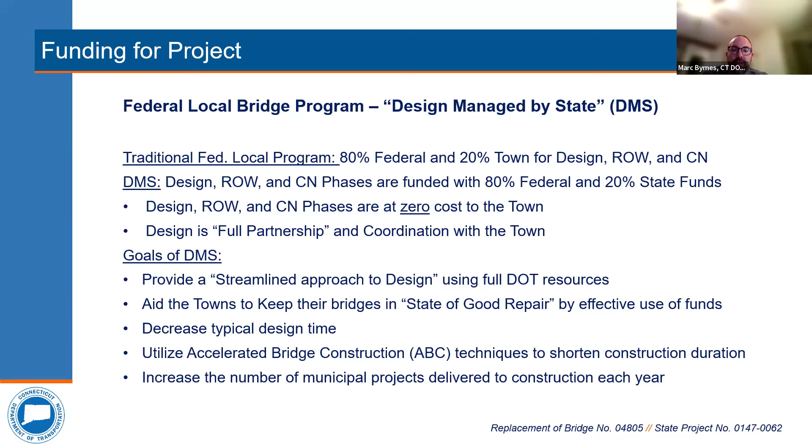While we are taking the lead on the design and the costs, it is still a full partnership and coordination with the town. The goals of the DMS program were to provide a streamlined approach to design using DOT resources, to aid towns in keeping their bridges in a state of good repair, to decrease typical design time, and to utilize accelerated bridge construction, or ABC techniques, to shorten construction duration and to increase the number of municipal projects delivered to construction each year.

I'll now turn it over to Tracy Hansen, Selectwoman for the town of Voluntown. Tracy?

Hi, good evening, everyone. Thank you for joining us tonight and welcome. I'm glad to see so many people here, and I encourage everyone to use the chat box to ask questions. Thank you, Tracy.

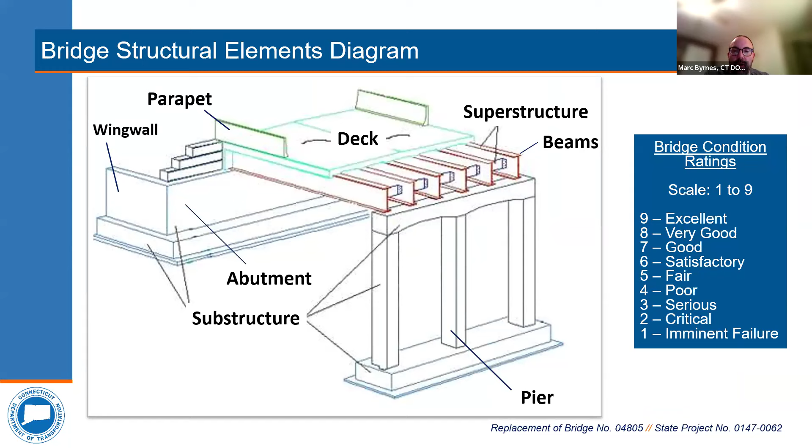The bridges are rated on a condition scale of 1 to 9, with 9 being excellent and 1 being an imminent failure. But please don't let that concern you, because if there were any issues, the bridges are monitored by the department and we would inform the town if there was a pending hazard.

As concrete cracking gets more severe, more concrete will pop off, exposing the reinforcing steel underneath. There are also other types of cracking that happen from settlement and different weight loads on the concrete.

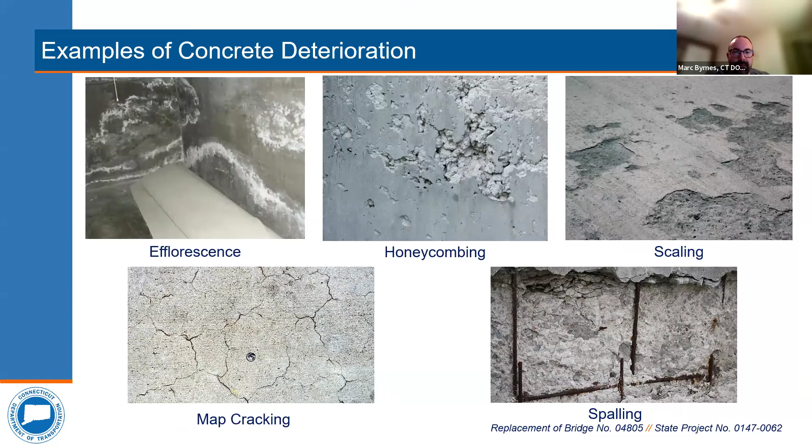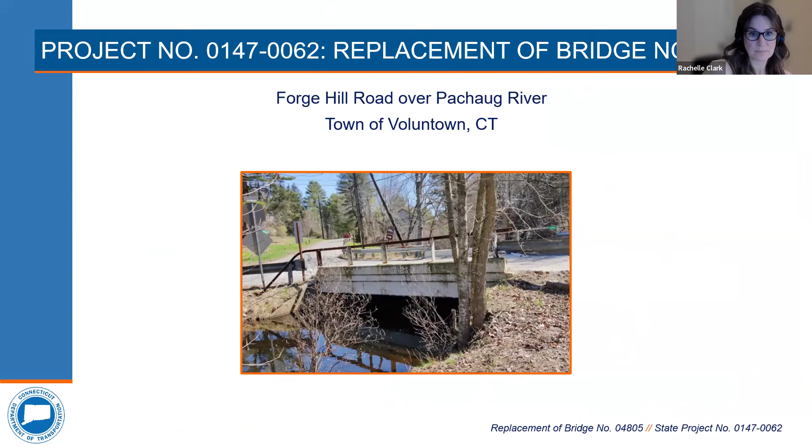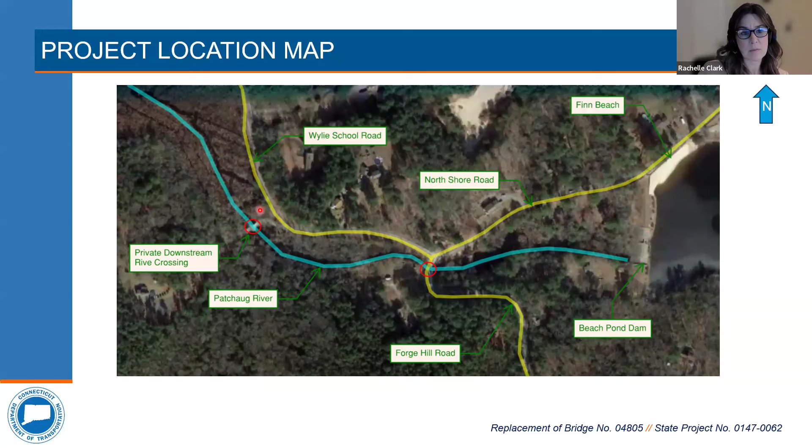The width of the bridge, from curb to curb, is 20 feet wide. This is substandard - federal standards are 22 feet and state standards are 22 feet as well. The ADT, average daily traffic, the number of vehicles that cross the bridge, is approximately 651 vehicles. Those traffic counts were taken in November of 2022.

The speed limit in the area is 25 miles per hour. Forge Hill Road is 25 miles per hour, and that is our design speed. When the traffic counts were done, the speeds were also taken. It was determined that the 85th percentile speed is 19 miles per hour, meaning 85% of cars are going 19 miles per hour or slower.

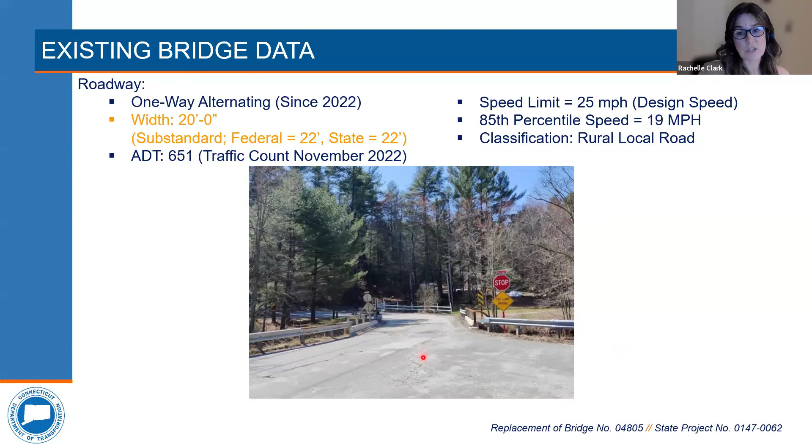This bridge is classified as a rural local road. In terms of our existing bridge, it was constructed in 1920, which makes it about 104 years old, so it's a fairly old structure. It was repaired in 2022 - there was an accident that damaged the north bridge rail.

That concrete slab is supported on abutments, and those abutments are supported on spread footings that are assumed to be supported by soil. Obviously these footings are below water and can't be seen. In terms of load restrictions, there are no load restrictions on this bridge currently.

In terms of hydraulics, the bridge is inadequate for a 100-year storm. Currently we have a 19.7 foot clear span, measured from the face of one abutment to the face of the other abutment. This is less than 30 feet, which is what would be required to meet standards.

That standard is 1.2 times bank full width. Bank full width is a way of talking about the river when it is running in an ordinary state - how high and how wide those banks are with ordinary water flowing through them.

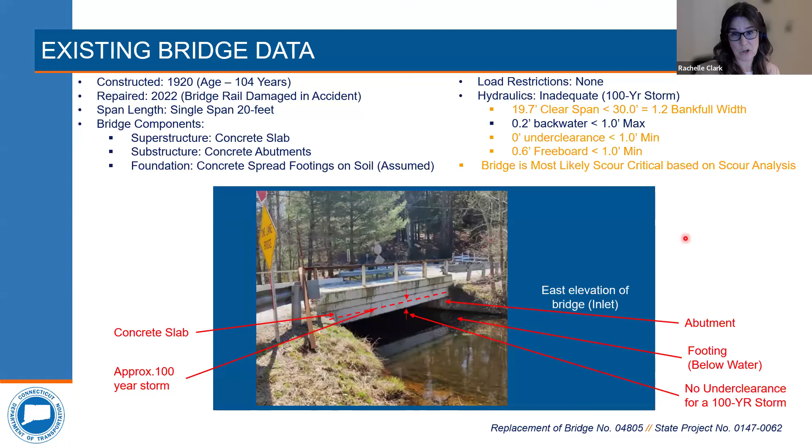Looking at our bridge, our deck, because it's covered with a bituminous or asphalt overlay, is really kind of the condition of that overlay. That's currently rated to be fair and was given a rating of 5.

Looking at our superstructure, this is where we begin to see problems. This is in poor condition and has been given a rating of 4. Our substructure is in fair condition, rated at a 5. Our approaches are also in fair condition, rated at a 5, and the channel and channel protection are satisfactory, rated as a 6. Currently, the bridge railing is rated a 7.

That rating is related to the condition of the railing. Our bridge railing currently does not meet the current safety standards. So if this bridge were to be built today, the railing would look quite a bit different.

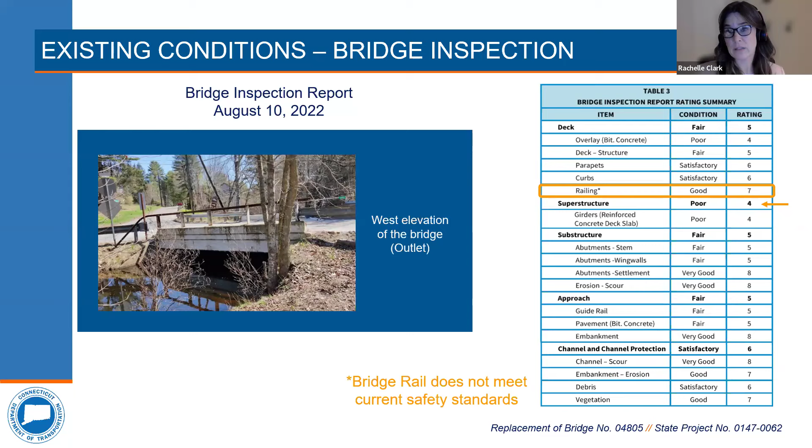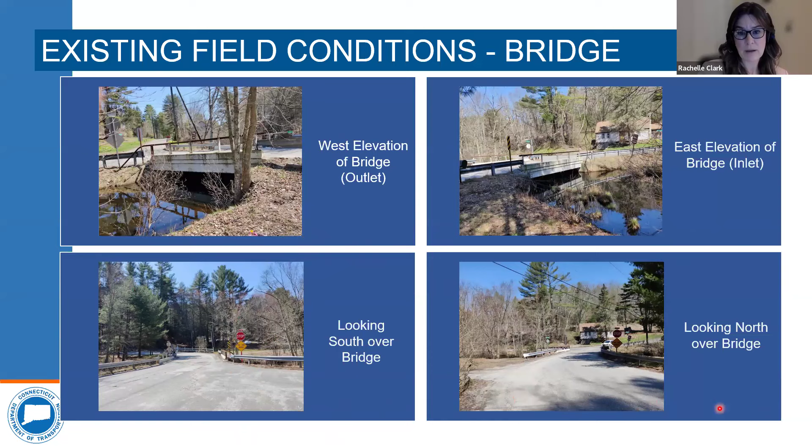Looking south over the bridge, you can see again that stop sign that I pointed out before. From the other direction, the photo in the bottom right is looking north over the bridge.

The top left photo is Forge Hill Road, in an area where we're trying to demonstrate that this has a fairly sharp curve as you come down Forge Hill Road. This is a tight radius as you approach the bridge and cross over. A couple other things to know: there are 2 driveways immediately adjacent to the bridge.

In the top right photo, we have a view of a skewed T intersection and poor condition of the overlay. You can see that the asphalt has broken up a little bit here. Again, this is an intersection where people come down and swing around to the right, making a hairpin turn. It's a skewed intersection as opposed to a true T intersection where you've got that 90 degrees.

The bottom left photo is the Western Bridge Rail. Where the arrow is pointing is where the curb was damaged in the accident, and this was the portion that was repaired. The bottom right photo is the Eastern Bridge Rail. No damage to that one, but again, this is a substandard bridge rail.

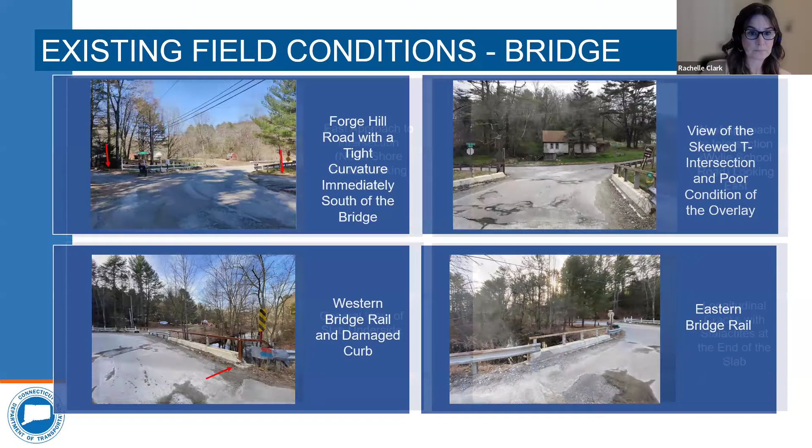The top left photo is the eastern approach to the intersection. As you're traveling down North Shore Road toward the bridge, this is what you would see. The west approach is in the top right photo. This is what you would see if you were traveling on Wylie School Road and approaching the bridge.

The next 2 photos have more to do with the condition of the bridge. The bottom left photo is the general view of the slab underside. This gives you an idea of what the bridge would look like if you were able to get under and look up toward the underside of the superstructure.

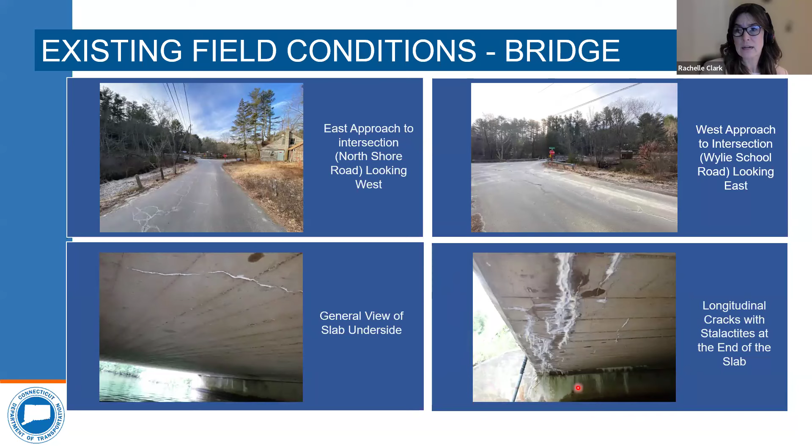The next photo is taken closer to the edge. What you see here is stalactites that have formed as water has dripped through the cracks in the concrete. It's brought minerals with it and formed those stalactites. So these are the kinds of things we see that indicate the superstructure is in poor condition and showing its age.

The southeast wing wall is shown in the top left photo. You can see a large amount of efflorescence, which occurs in areas where the concrete has cracked and water has flowed through it, taking dissolved minerals with it and then depositing them on the surface of the wing wall. All 4 wing walls look pretty similar to this photo.

The top right photo shows the north abutment. Again, you can see those stalactites from the cracks, but this photo was really meant to show you the condition of the abutments, and those abutments are in fair condition.

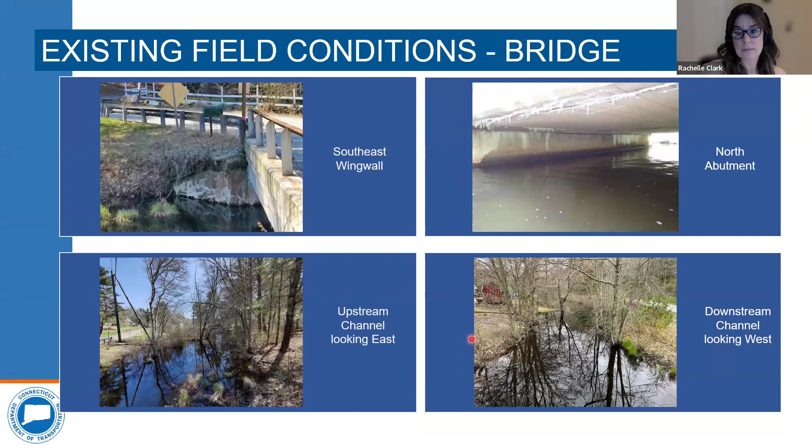The photo in the bottom left shows what you'd see if standing on the bridge looking upstream, so looking east, this is what the river looks like. In the bottom right-hand photo, we have a view of the downstream channel, looking toward the west.

In terms of the project and why it was initiated, there are several needs for this particular project. One is to restore two-way traffic. Another is to address the poor condition of the superstructure. Also to address scour and make sure we're not concerned about material washing away during a large storm in the riverbed.

We also need to determine the load rating capacity to confirm adequacy to carry legal loads and emergency vehicles, replace the substandard bridge rail that was damaged in the accident in 2022, and provide a 22-foot wide roadway that meets current standards.

We were also asked by the town to provide a 5-foot 6-inch sidewalk on the east side of the bridge. And we're also looking to improve that intersection, that skewed T intersection, and make it a better configuration.

So in terms of being able to address all of these things, our proposed rehabilitation is to fully replace the bridge. Despite the deficiencies, the bridge is safe for traveling public, and is inspected by Connecticut DOT on a regular basis.

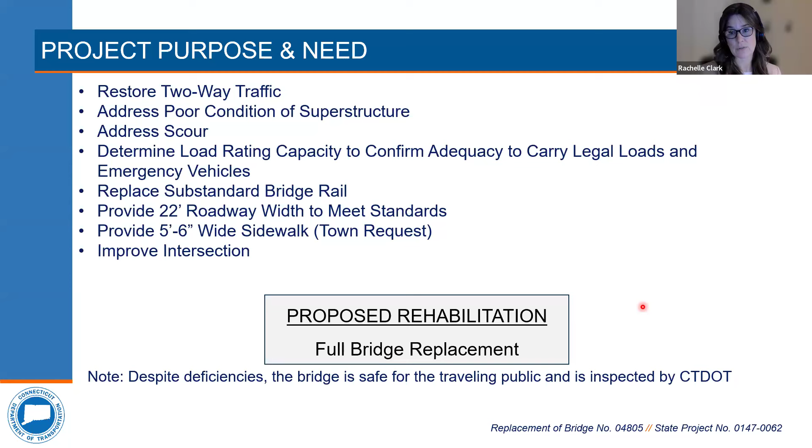For our proposed improvements, we are proposing a pre-stressed concrete solid deck beam bridge. This will provide two-way traffic with a 22-foot wide roadway. This bridge is anticipated to have a 75-year service life with minimal maintenance. It will carry AASHTO design, legal, and permit vehicles, as well as emergency vehicles.

The pile foundations proposed for the project will be designed for scour. It will have an open bridge rail and an approach rail system meeting current standards.

If you see the bottom photo on the right, this is a concrete bridge. You can see this portion right here, this is what a concrete beam looks like from the side. This black rail is an open bridge rail, and in the top right you can see another photo showing that open bridge rail.

In terms of the bridge functionality, we are proposing that 5-foot 6-inch sidewalk that the town requested. We're intending to take that skewed T intersection and square it up to improve that intersection and also improve roadway drainage. We're looking also to improve the hydraulic performance by widening the structure.

It'll have a 34-foot span, which gives us a 30-foot 6-inch clear span, that's face of abutment to face of abutment. That will give us 1.2 times our bank full width and meet current standards.

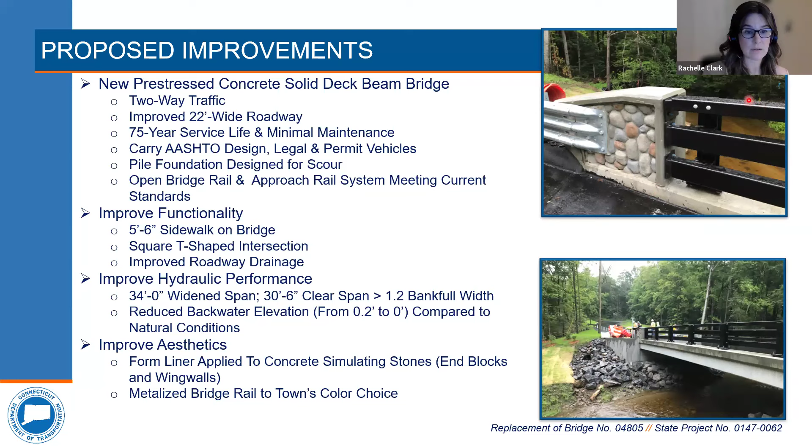Our concrete solid deck beam bridge is comprised of 6 concrete deck beams. Looking at this cross section of the bridge, you'll see that it is 31 feet out to out, comprised of 2 11-foot lanes, our 5-foot 6-inch sidewalk, and 2 1-foot 9-inch bridge rails. That's supported by our 6 solid concrete deck beams, which are joined by closure pours.

The bridge is protected with a spray applied waterproofing membrane that is then topped with an asphaltic topping layer.

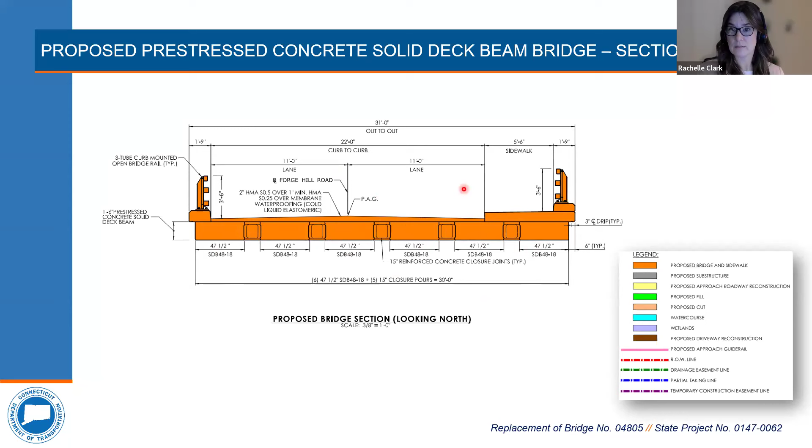This is an overview of the proposed bridge layout.

Just to run through some of these colors real quick: orange is our proposed bridge and sidewalk, the gray is the proposed substructure, yellow is the proposed approach roadway and intersection, the green areas are proposed fill, and the tan color indicates areas of proposed cut where material would be removed.

The blue is the water course. Purple is wetlands, so that's what's shown in these areas of purple. And then the darker brown are the driveways that are adjacent to the project.

The pink line shows where there will be metal beam rail. The red lines are rights-of-way lines, so these are property lines. The green lines indicate areas of drainage easements. Blue lines indicate areas of partial takes, and purple indicates areas of temporary construction easements.

So looking at this plan of the bridge, you can see that we have a 34-foot span. The bridge is slightly set on a skew, so when we actually look at the clear span, face of abutment perpendicular to face of abutment, that distance is 30 feet 6 inches.

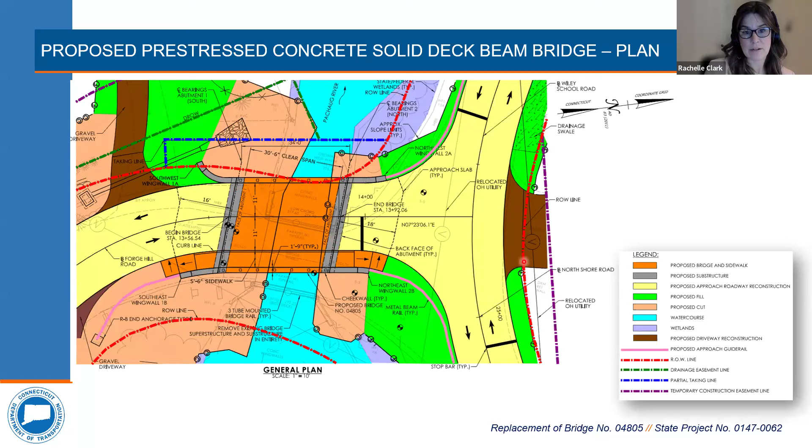The orange, again, is our superstructure. The gray is our substructure, and this has U-shaped wing walls. And the yellow is our roadway.

This is a picture of the bridge taken from an elevation view. Again, you can see that we have our 30-foot span. We have our superstructure with our 3-tube open bridge rail. We have wing walls on both sides, and we've indicated our form liners to give it that stone look.

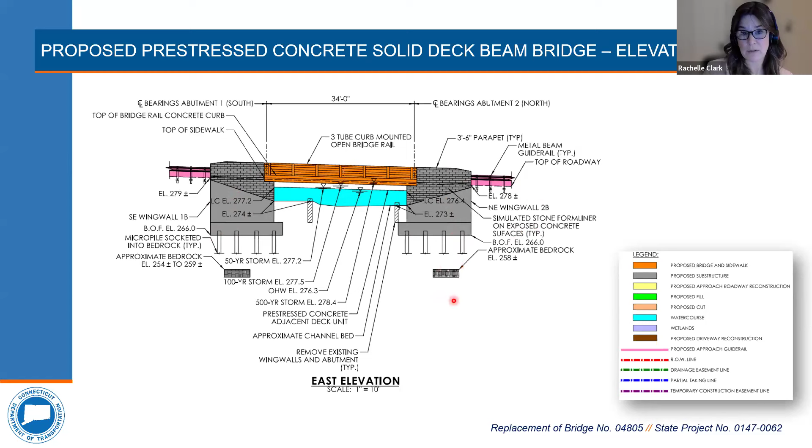We also have metal beam rail that attaches to each end of the beam of the bridge. Our wing walls and our abutments are supported on pile caps. Those pile caps in turn are supported on piles, and those piles will go down to bedrock, and all of that will be designed for scour.

We were pretty much limited to making sure that the property here could maintain their existing driveway. So that drove a lot of our preliminary design, and the roadway didn't raise or lower. We are widening the bridge, and in order to get that additional width, the bridge was expanded to the south.

I do need to step back a minute. One thing I forgot to mention is that in these plans, north is to the right, and I apologize for not explaining that earlier. It's a little confusing, but if you were to come down the roadway and cross the bridge, you would be moving from south to north. So if you are on this page and on the left-hand side, that is actually south, and over here is north. I should have explained that with the first plan of the bridge.

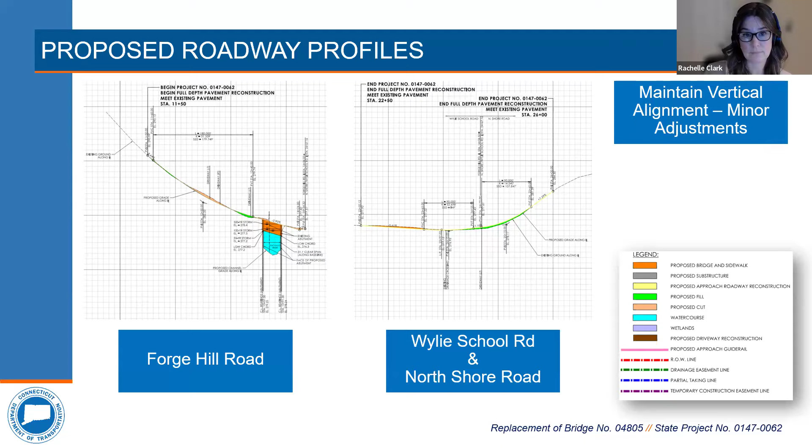So that's not wide enough for 2 lanes of traffic. It'll be alternating one-way traffic similar to what's out there now. The biggest difference is that this will be stoplight controlled as opposed to stop sign controlled. There will be detectors that detect vehicles and turn the lights from green to red as appropriate to allow traffic from the 3 different roads.

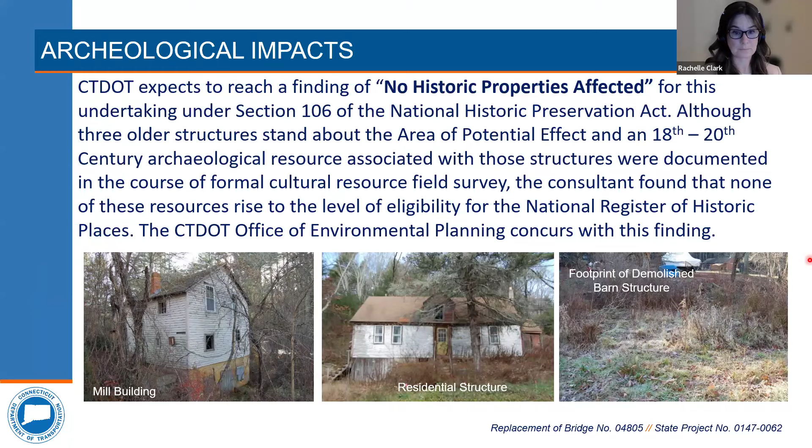In terms of rights-of-way impacts, this work is going to affect the neighboring properties. There are 3 properties: one to the north of the bridge, one to the southwest of the bridge, and another to the southeast of the bridge. Again, this plan is oriented with north to the right.

Looking at the impacts, because of the new alignment of the bridge, there will be a small portion of property that will need to be taken to accommodate both the substructure and the town's need to maintain the structure. There are 3 areas that will require drainage easements as part of the project, and 3 areas of construction easement on the properties. The largest construction easement is to the southwest of the bridge, primarily to accommodate construction of the temporary bridge.

In addition to that, there are some rights that will be required. There will be a right to grade, which makes sure the proposed grades smoothly transition to the grades on adjacent properties. There will also be the right to reconstruct driveways - there are 3 driveways in the area that will be impacted by the construction. And last will be the right to install and maintain sedimentation and erosion control fencing.

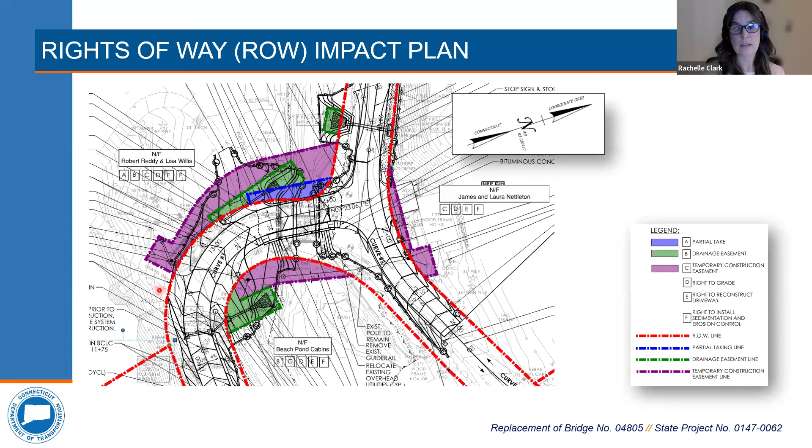Thanks, Rachelle. My name is Zachary Garino, project coordinator with the department's Division of Rights-of-Way. Our office is responsible for acquiring the property rights needed for transportation projects. This project will require acquisition of property rights, so I'd like to give a brief overview of our acquisition process.

Before I begin, the specific impacts are still being finalized and may change as the design progresses. Any required property rights will be acquired in accordance with Connecticut General Statutes sections 13A-73 and 13A-98E, as well as the Uniform Act.

The right-of-way acquisition process begins once the design has progressed to a development milestone and all impacts have been determined. At this point, each affected property owner will receive a formal letter of intent to acquire from our office, along with a property map depicting the exact property rights to be acquired.

On the screen here is an example of a property map that an owner might receive. They'll see the proposed conditions for their property and the areas associated with those improvements.

Next, our office will determine the fair market value of the property rights depicted on the map, which will be used to establish an offer of just compensation.

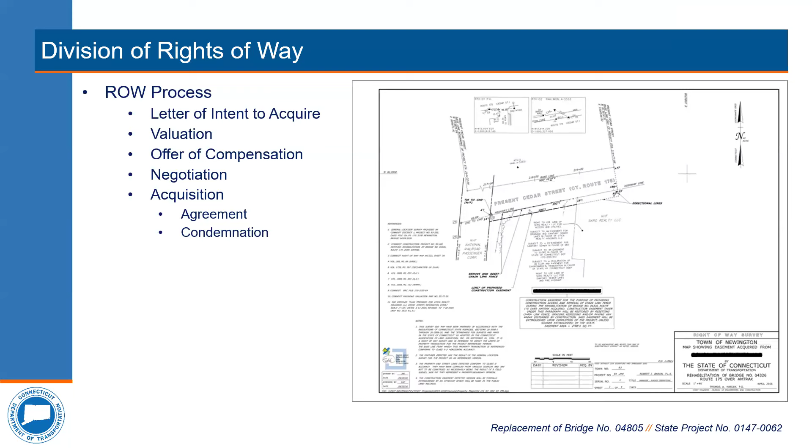Thank you, Zach. In terms of our project schedule, currently this project is slated to begin in spring of 2026. That is subject to getting all of our permits approved.

The construction duration is anticipated to be 20 months. There are a significant amount of overhead utilities that need to be relocated, which is why we anticipate a little bit longer than a 1-year duration.

Our construction cost is $4,360,000. Again, this is 80% federal funds and 20% state funds. So this project is at no cost to the town.

One thing important to note is that the cost and schedule are preliminary and subject to change. At this time, we will open up the program to a question and answer session.

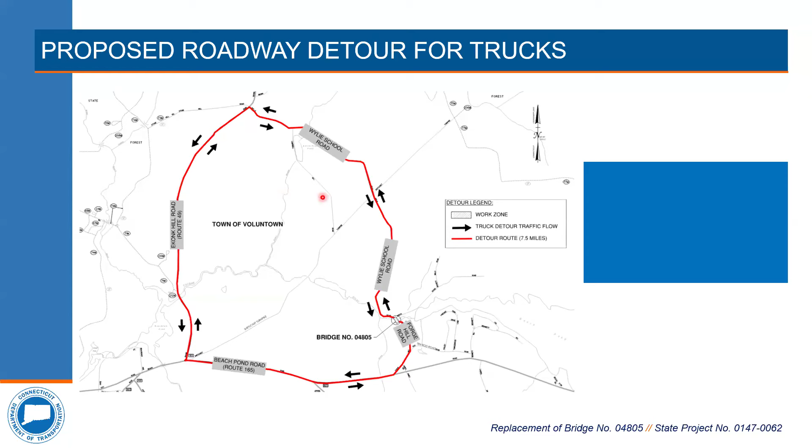I don't know, I have not gotten anything in the Q&A portion of our chat box for the presentation at this time, but I believe the sharp turn near Hardica's would be taking a left onto Shetucket, right there. But this detour goes straight. So he's probably referring to this one, just west of the tree farm.

Is that west? This area here. So that turn. Let's zoom out a little bit, Rachelle. Okay, I was going to try to see if we could take a look at it. That is the question, the turning question. Yes.

One of the things that does appear is that this is kind of... I believe this is the right spot that we're looking at. So we can definitely ask the designers to take a look at that. If it does turn out to be a problem, this is an area where we could do some additional temporary pavement to make that an easier turn.

The detours for truck traffic are previously mapped to make sure that they can accommodate the radiuses required for a typical 18-wheeler dimension.

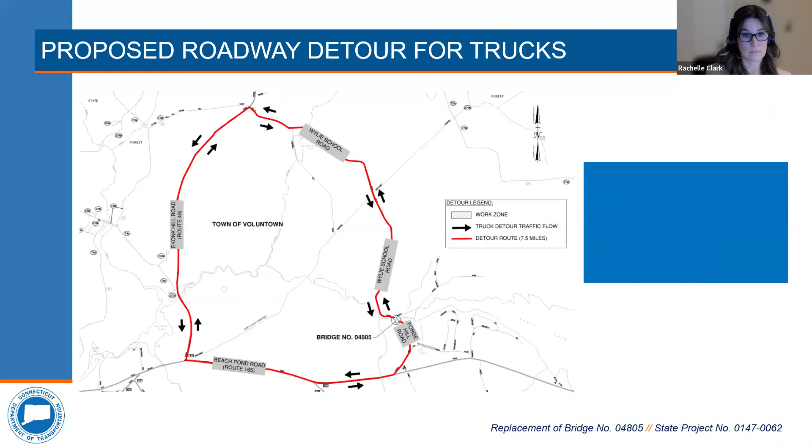Rachelle, is this project going to cost the town anything? This project is being funded with federal funds, coming from FHWA, Federal Highway Administration. That's 80% of what it costs to design and build the project. Then 20% of the money is coming from the state of Connecticut. So there is no town money being used for the design, the rights-of-way acquisition, or the construction of the project.

Great, thank you very much, Rachelle. If there are any other questions at this time, you're more than welcome to ask.

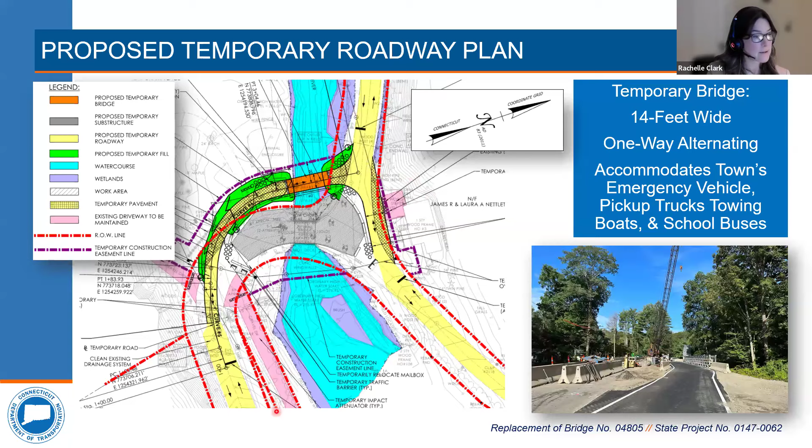Where we do have improvements along the roadway for drainage is a little bit further to the west. In this area right now, this is kind of a swale area that collects water, and there is going to be a catch basin installed, which will divert water across the roadway and out into the river on this side. If you have more specific questions about that, please feel free to reach out to us and we can talk through that a little bit more.

Rachelle, if I could just add a little bit to that. The standard ConnDOT driveway design keeps the water in the roadway. So wherever there's a driveway, the paved portion that abuts the roadway is going to be designed such that the water stays in the gutter line of the roadway and doesn't go down the driveway. I'm not sure if that was part of the question, but that's how it's going to be designed - keep the water in the roadway and not go down the driveways.